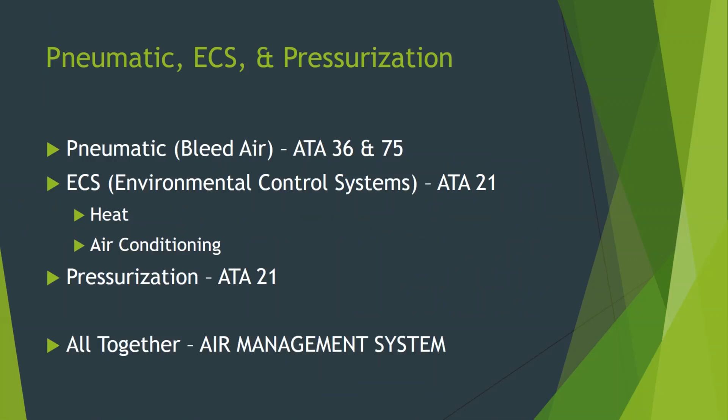So when you put these all together, the bleed air supply and the ECS, it's the air management system. That's a term you'll see some aircraft manufacturers use, some don't, but it's a very high level kind of catch-all. And so if we look at what that is in the airplane, you see something that looks like this.

Laid out inside the aircraft, you've got your engine supplying air. Any idea why there's an air duct way back here? What's back here? Outflow valve are these two little circles right here. Any idea what this ductwork would be going all the way back? What's in the tail? The APU, right? That's the APU - it can be supplying bleed air back in the tail there.

So our supplies - three supplies - left and right engine, APU, and then the ductwork that runs around. Pressure stuff going to the air conditioning system, running the air cycle machines. Some of it's low pressure air, like all these ducts kind of coming up the sides of the fuselage - those are just distribution ducts. We're going to put that air in various parts of the fuselage, run air up to the windshield area and the control cabin, cargo compartment, all those various areas. And then there's also things like water tank pressurization.

That's so water comes out of the tap in the bathroom when you go to wash your hands. It can also run lavatory, some like vacuum - it can provide, using a Venturi, vacuum to suck things out of the toilet. You flush the toilet, and it sucks the stuff away, if it uses that type of vacuum toilet system. And then other parts are like avionics compartment ventilation, keeping the various computers and equipment cool and things like that.

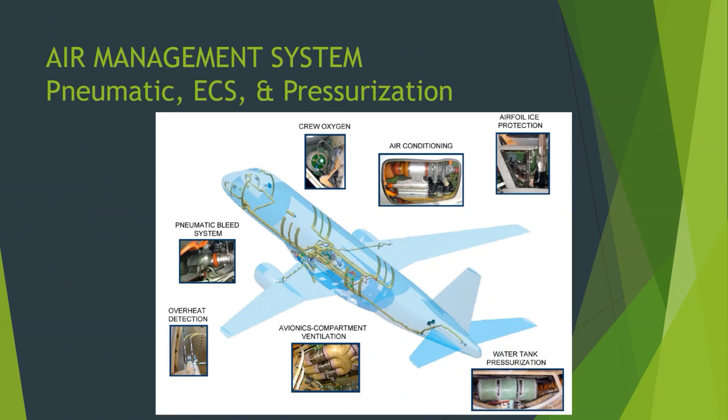So looking at kind of the pylon area, or the engine area, the airframe pneumatic system - you can see on our engine, we're typically going to have a section of ductwork. We're going to connect to one or two spots on the engine. Often there's a pre-cooler on the engine because that air coming off of there is too hot even to do anything on the aircraft, so we're going to pre-cool it a little bit before it even goes up into the pylon area or through the pylon area.

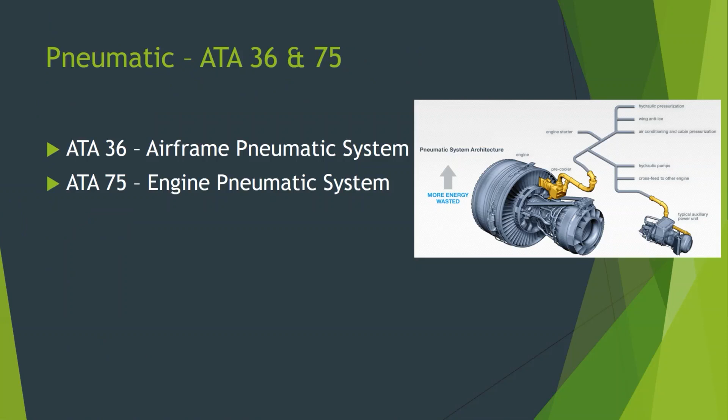The APU has its little pull off there, typically a single pressure source on the APU, and then out to the various systems. So the division point, if we want to look at whether it's ATA 36 or ATA 75, is typically what's called the pylon shutoff valve, pylon firewall shutoff valve, or the SPAR shutoff valve.

Any kind of engine, whether it's a turbofan engine or our APU, the little auxiliary power unit engine, those have to be encased in something called a fire zone. So they're going to have firewalls and other enclosures, typically made of either steel or titanium, that fully enclose them.

If there's a fire in that area, because we've got fuel, an ignition source, and air in those areas, we need to be able to isolate it from the rest of the aircraft. Part of that isolation is wherever the different connections run through the firewall, we want to be able to close those off to seal the firewall.

So your bleed air duct shutoff valve is going to be right there at that firewall, 9 times out of 10. You also have hydraulic shutoff valves and fuel shutoff valves and everything else in order to isolate that, but we'll talk about that with fire protection systems. This also serves as that dividing point between whether it's an airframe pneumatic system or the engine pneumatic system for most aircraft.

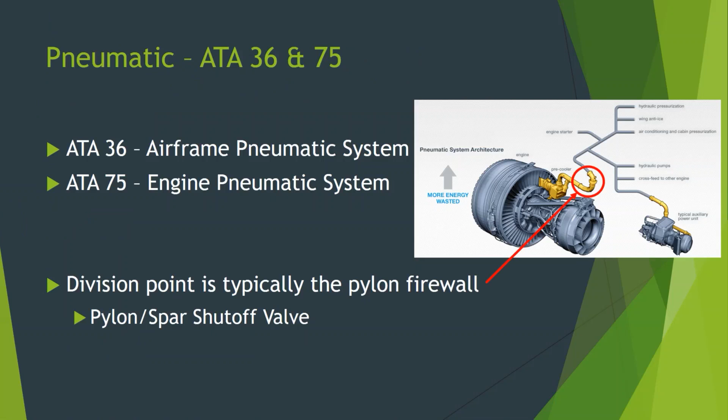You can look at it from a schematic diagram standpoint as well. Here you can see the areas in the boxes - here's our engines on the left. The areas in the boxes are considered the engine pneumatic system, and the areas to the right, this manifold and the various items, that is the airframe bleed air system.

In this case, the firewall is inside the box, kind of, and this shutoff valve here is essentially that firewall valve. On this particular aircraft, they put it upstream of the air that flows to the starter, and that's so you can get air back to the starter.

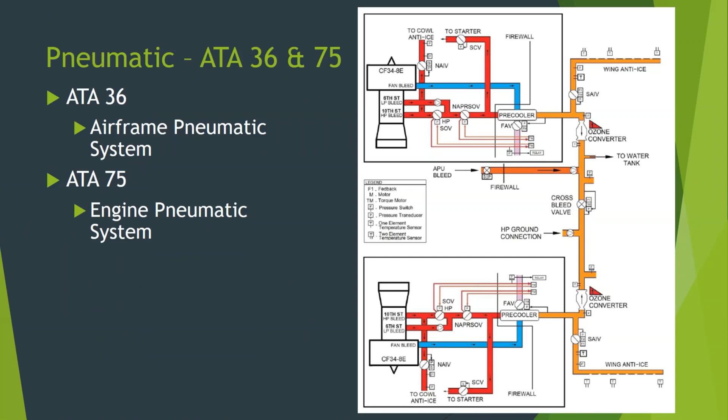If you look at it from a control and indication standpoint, these schematics on the right coincide with the EICAS display we see here and the control panel we see here. This is your most modern aircraft - older airplanes are going to be steam gauges and analog gauges. You can see the shutoff valves illustrated next to each engine, controlled by a bleed switch on the left and right bottom corners of the control panel, laid out in the same manner.

The APU also has a shutoff valve - you can see there's a bleed shutoff valve for the APU.

Most of the time, on something like this - this is out of the Embraer 175 - as modern as this is, these are going to be automatically controlled for the most part. These buttons are more of an override system. Older airplanes you have to manually control. When we ran the Boeing 727, you had to manually open the cross-flow valves and manually turn everything on and off, right?

Newer airplanes like this, often they're left in automatic mode, and based on what air sources are running, the computer that manages this will open and close these various shutoff valves. These isolation valves - you can see it's called a cross bleed valve or isolation valve here in the middle - and then air flows up to the pack for environmental control.

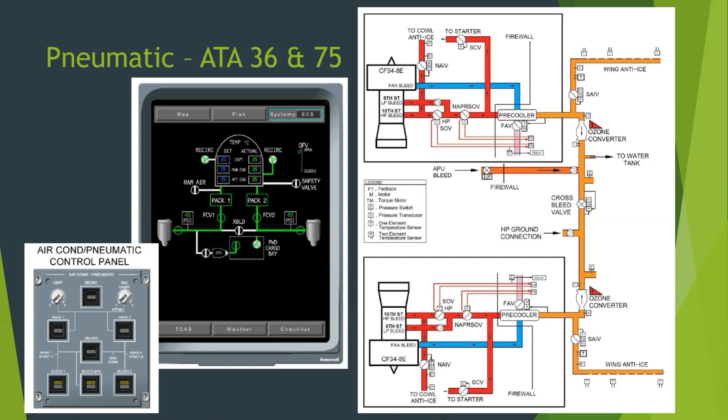Rather than saying okay, you've got to activate the fire system, then close the bleed valve, then shut off the fuel, close the firewall fuel valve - no, when you hit that, it does everything. It seals that engine off. This is one of the items that'll be controlled through that same kind of control computer and logic. So this feeds into user systems.

Who uses bleed air, or what uses bleed air? What are some of the items on the aircraft that are going to use bleed air, use pneumatic, or be users of the pneumatic system?

Anti-ice, thrust reverser. What else? Fog protection, part of anti-ice and rain protection.

Door sealing, that was in your report, wasn't it? Yeah. Pressurization, door seal pressurization, that's part of it. But a lot of the doors have seals that inflate. So you close the door and then you want to get a good seal. When you pressurize, when you turn this on, the seals inflate and squeeze, filling that gap between the door and the fuselage. Air conditioning, heat, environmental control.

So you can see there's a lot of things. Engine starting is part of this. These turbofan engines use air turbine starters rather than electric starters, so you need pneumatic for that.

Hydraulics, what is it used for in hydraulics? When we talked about hydraulics, where did pneumatics come into play? It can run pumps, there can be pneumatically driven pumps. What else?

Scavenge pumps, more fuel system. Right there you've got fuel. It can run, sometimes it can run fuel type pumps, or pressurize the fuel tanks to help push fuel.

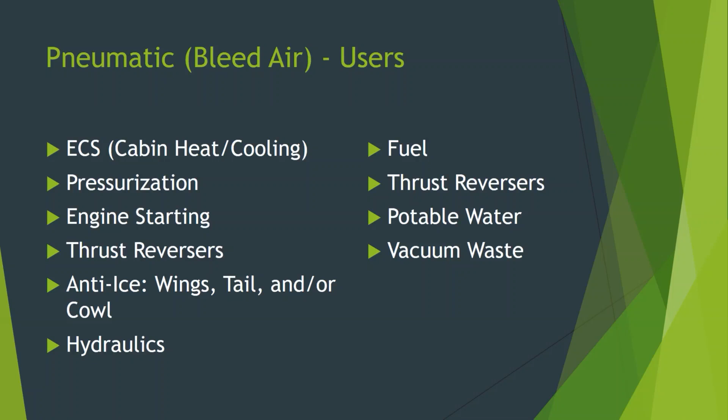Some others, now into sources. Getting our engines, our APU, and then we worked with a ground air cart start when we did the lab, a huffer cart. They can also be bottle carts. We had one of these at the first airline I worked for, a little Podunk airport in northern Wisconsin.

A bottle cart is a giant air bottle that you get like 1 or 2 engine starts out of, and then it's done. It's got a little shop air compressor on it that has to sit there and pop, pop, pop, pop, pop to refill it. It takes like 7 or 8 hours to refill the bottle.

It's used. So we had it, and first of all it was never pressurized when we actually needed it to be, because someone forgot to plug in the little compressor. And second, it seemed like our pilots, anytime they did a start with one of these, they forgot how to start the engines and they would end up misstarting. And if the bottle did have pressure, they would end up using all the air in the bottle, and then they wouldn't have running engines, and they'd sit there for another 6 to 8 hours to repressurize the cart.

But one of the issues with bleed air from any of these locations, particularly the engines or the APU, is that it's a very expensive form of energy to use on the aircraft. And by expensive, I mean when you turn on bleed air - if you are operating an engine or the APU and you open that valve and begin to use bleed air, you turn on your packs or you turn on wing anti-ice - you can see a significant increase in fuel burn, as well as typically an increase in exhaust gas temp or interstage turbine temperature.

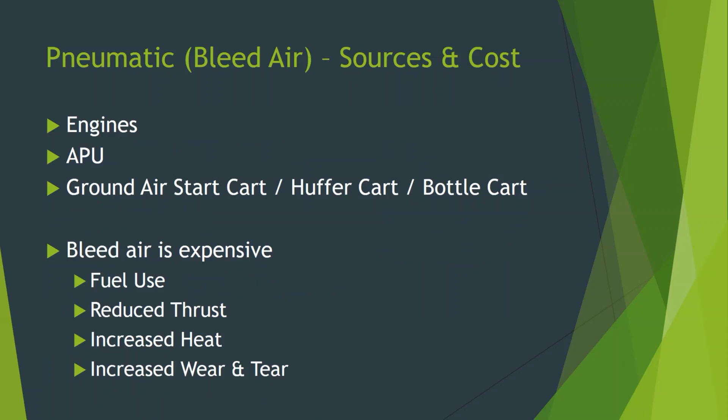So we have to be able to control this. On aircraft that use this system, we've got different control methods. These include shut-off valves, which are simple on-off devices, typically fully open or fully closed. They can be operated different ways. Things like solenoids are electric. They can use the air pressure itself in the system to pneumatically operate. They can be motor driven, so a motor versus a solenoid. A motor is a physical gear motor turning thing, while the solenoid still uses a diaphragm type device inside of it. They can also be check valves, which are typically spring-loaded closed, and pneumatically operated.

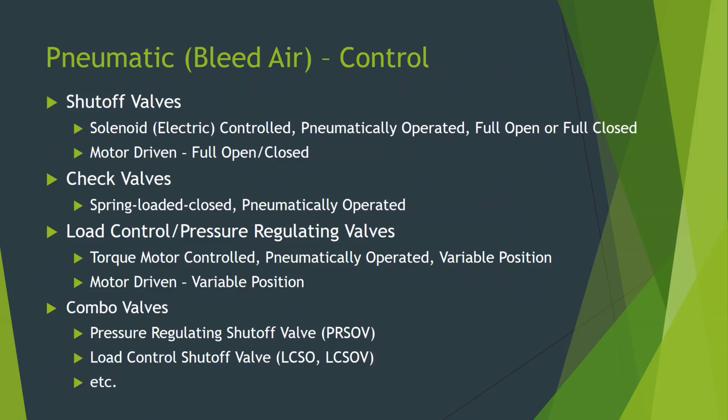How are they pneumatically operated? Air just pushes against them and they pop open. We can also have load control or pressure regulating valves, often combined with a shutoff valve. And then things like combination valves, a pressure regulating shutoff valve or load control shutoff valve, work as a shutoff valve while also doing some kind of regulation.

So what do these look like? Here is a load control pressure regulating valve. In this case, here is our duct, and we've got to be able to turn it on and off. We take a little bit of pressure from the pressurized side and run it up against a diaphragm. That diaphragm has spring pressure on it. Now what that's going to do is, as that diaphragm moves, it's going to turn this little torque shaft, and that's going to open and close a butterfly valve.

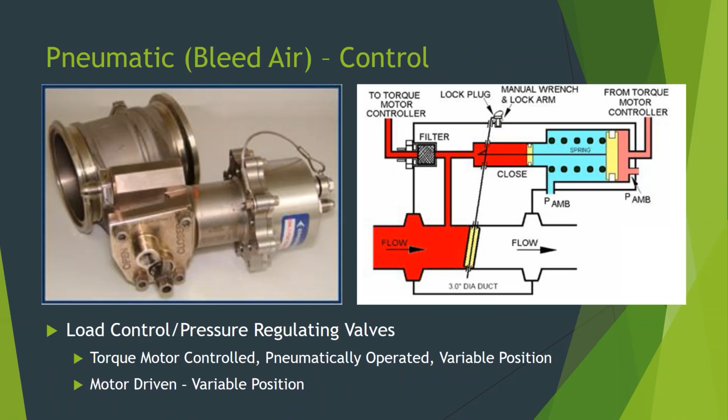Now, if you just ran the pressure here, it would push this open all the time, or maybe it pushes it closed. I shouldn't say it opens it all the time - some of these fail closed, some fail open. When you shut off the pressure, some automatically go closed, some go open, it just depends on the design. What happens is some of the pressure comes here and goes to what's called a torque motor controller, which can do a couple things. One is it can bleed off pressure in this area, which allows that spring, allows that plate to move. The other part is it can add some air to this side, which will increase or decrease the spring pressure here. So we can use one of these little devices to control that valve.

So it's still operated pneumatically, but it is controlled electronically. Essentially, here's that high stage air coming in, and it's got this little torque motor - basically an electromagnet type flapper valve thing. If the torque motor is pushed over this way, it's going to close this off, and you're going to get ambient pressure going to your high stage bleed. It's going to reduce the pressure going back to the right side of that valve, reducing the pressure coming back here.

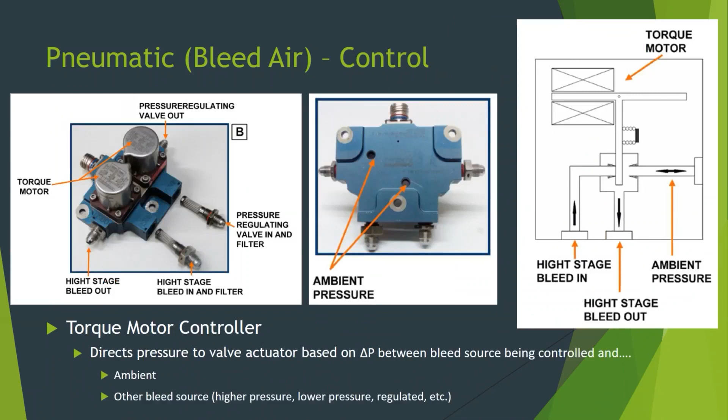If we open this flapper, it's going to come across and block off the ambient pressure, and now that high pressure is going to go down. That's the slide I'm looking for - they should be more above each other. But we move this over to the right, this torque motor end moves to the right. High pressure air can flow through here, and then it's going to come back down the right side of the actuator, push on this, move it to the left, and you can see that's going to have some valve control. So we can use those differential pressures to push that valve control piston left and right and be able to open and close the valve using an electronic signal, but not an electric motor.

These are very low current. The electric signal coming here, they're just little tiny electromagnetic things, so they don't use a lot of current. We don't need to run big, heavy-duty wires to run some kind of an electric motor to push the valves open and close. So that goes there, that can go back and forth there, and this thing can move left and right in order to operate it.

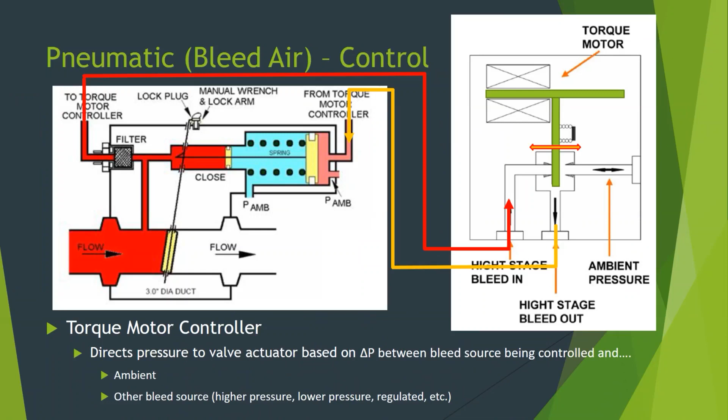With all of these, we've got hot air traveling through the airplane. We want to make sure that we don't have any leaks anywhere that could potentially cause damage. And so in these systems, we have bleed leak detection or overheat detection systems. These can kind of be looped in with or contained in fire protection, fire and overheat protection, but they're also kind of part of this system as well, because these are loops or spot detectors similar to what we'll see in fire protection systems, but they activate at a much lower temperature - at the air temperatures we'd expect in the ductwork, 300 or 400 degrees, versus fire temperatures of around 1,000 degrees.

And again, this one shows ones that are loop type - they run along the sides of the ducts, similar to the Kidde and Fenwal type loops you've seen. They can be coaxial, which is like a Fenwal dual element, or like a Kidde. We'll look at them next week when we do fire protection. But they run alongside the ducts.

Now, what problem do you see with that? If they run along one side of the ducts, what kind of a problem does that potentially cause? If you're trying to find leaks in the ductwork and they run along one side, it doesn't cover the circumference. What if we get a leak in the top and it's going this way?

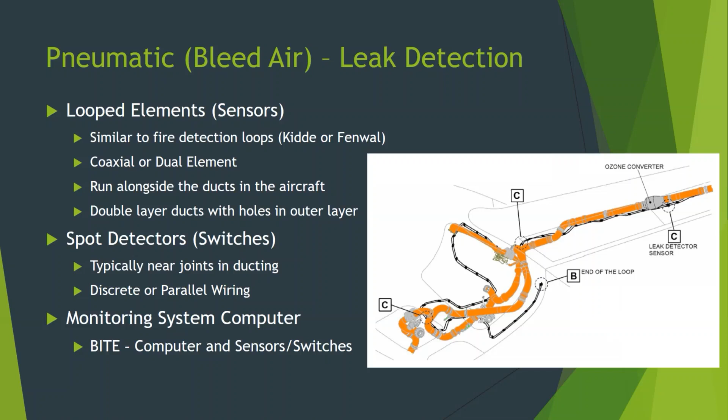So now that we've looked at this system, we're going to start looking at some of the users of it. We talked about ice and rain protection in an earlier lecture. Today we're looking at the environmental control system, so now we move out of ATA Chapter 36 and into ATA Chapter 21, which covers environmental control and gets into pressurization and that kind of thing.

So the environmental control makeup includes our packs, which provide heating and cooling—you can see those on this diagram, there's a left and a right pack. These systems typically have some kind of filtration.

Now, the air coming from the engines rarely gets filtered—there's really not much in it up at 30,000 feet, maybe a little dust. But what part of the engine is it coming off of? Where are we getting the bleed air from? It's coming off the compressor—could be stage 5, 6, 7 depending on the engine. So there's no... don't make the mistake of thinking it comes off after fuel is added. Sometimes students say, 'Oh, it comes off the combustion section.' No—you wouldn't want to route combustion gas into the airplane, you'd give everyone carbon monoxide poisoning. It's coming off the compressor, before it gets to the combustion chamber, before fuel's ever added. The heat purely comes from the compression—taking that air and squeezing it and squeezing it in the compressor, that's where we get the 400 or 500 degree air we need for these systems.

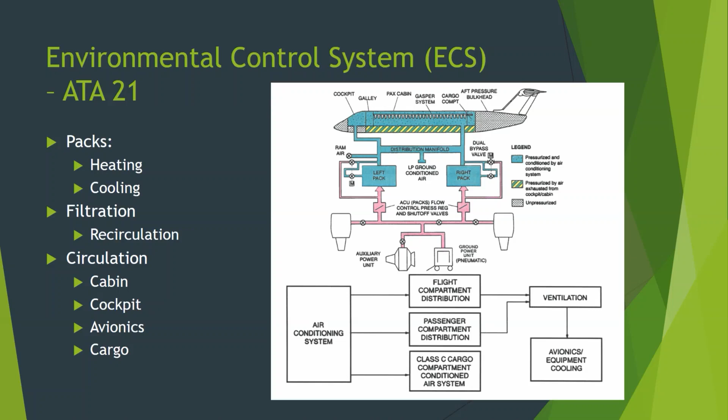So yes, animals are terrible for corrosion. We got a 4-year-old plane back from Vietnam where they'd been bringing chickens on board, and it was more corroded than some of our 15-year-old airplanes, because farmers could just bring them in the cabin with them. You got to bring your chickens to market, so you bring a cage full of chickens in the cabin. This plane was disgusting.

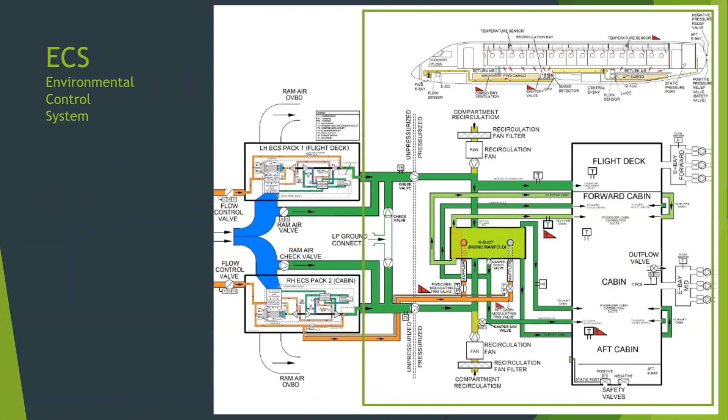The engines aren't working as hard. They're going a lot slower, not compressing air as much. And so we'll get to these systems on the aircraft. Environmental control, we already talked about.

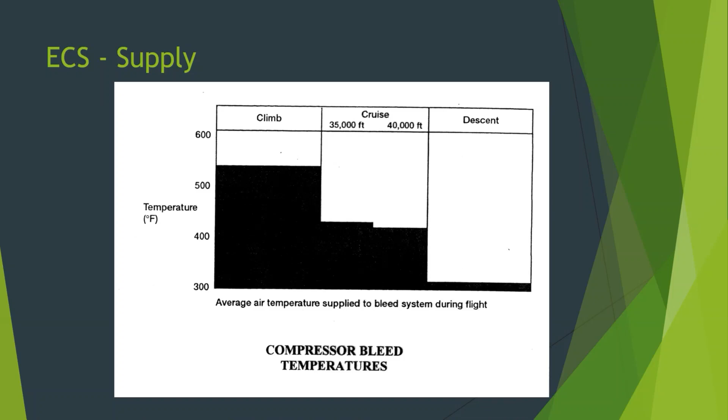Ice and rain protection, they're going to have to deal with these different temperatures. So the way they do that is many engines, and you've seen this already, are going to actually pull air from different sources on the engine. So there's a high pressure and a low pressure source.

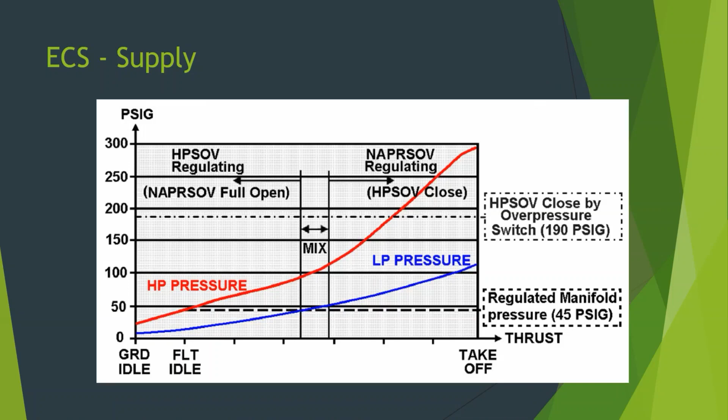And so that 45 PSI is going to go into our ECS pack. And as I mentioned a minute ago, it's made up of an air cycle machine, which itself is a turbine driving a compressor. It's also known as an expansion turbine driving a compressor.

Typically two or more heat exchangers, often called the primary and secondary heat exchanger, which are cooled by air. When the plane's flying, they're typically cooled by ram air, but on the ground, they're going to have some method of forcing cooling air over them.

The 727 uses electric fans, there's electric fans that come on. Other aircraft, this expansion turbine not only drives the compressor, but it'll also drive a fan to do it. So it's a mechanically driven fan, but one way or another, there's some kind of a fan that's typically used to run cooling air over those heat exchangers so that heat energy can be dumped overboard.

And then we got to mix hot air and cold air back together in order to get temperate air for our cabin. So that's done by things like dual bypass valves, mixing valves, and then some kind of a manifold.

To control all this and monitor it, you're going to have various pressure and temperature sensors in quite a few different areas, especially on new aircraft. They are all over the place in there. They've got turbine inlet and outlet temperature and pressure, compressor inlet and outlet temperature and pressure, heat exchanger primary in and out temperature, secondary heat exchanger in and out temperature. They've got all kinds of stuff.